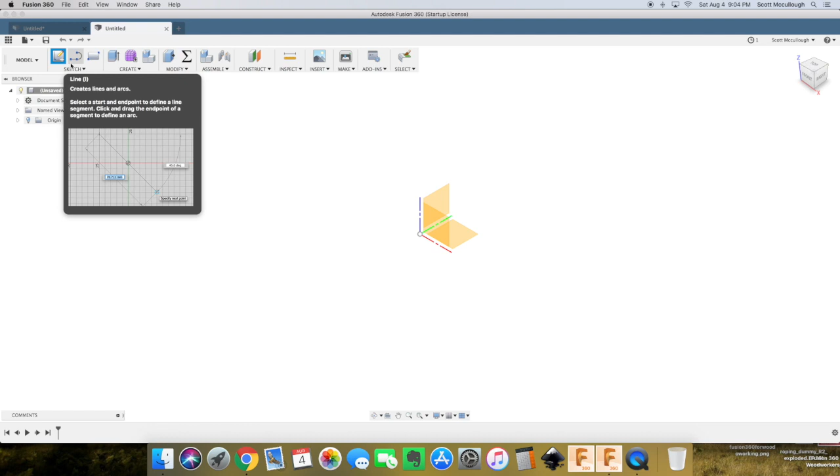Yesterday I gave you the general overview of the interface, and we went through the sketch drop down menu. To create a sketch, it has to be either created on a face, like a face of an object—let's say if you had a cube, it'd be on one of the sides—or what's called a plane, which you can see here. You get a top plane, left or right depending what side you go on, the front, and then bottom.

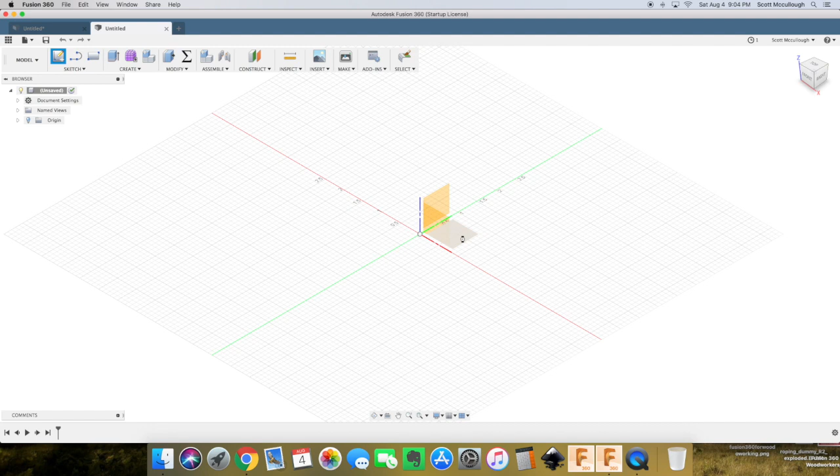So we're going to create a sketch on the top plane, and you can see when you get it selected how it changes. So we're at the top plane, and then I'm hitting R for rectangle, and you can see when I create that sketch on the top plane we get a little origin point. It auto snaps to that origin point, or you can draw it wherever you like. But normally, whenever I start a new design, I always start off on this origin point.

So we hit R for the rectangle, start out and drag one corner out on the plane. We'll just draw that out, and that's basically a rectangle—that's a sketch. I'm going to hit Control Z, or Command Z depending what type of machine you're on.

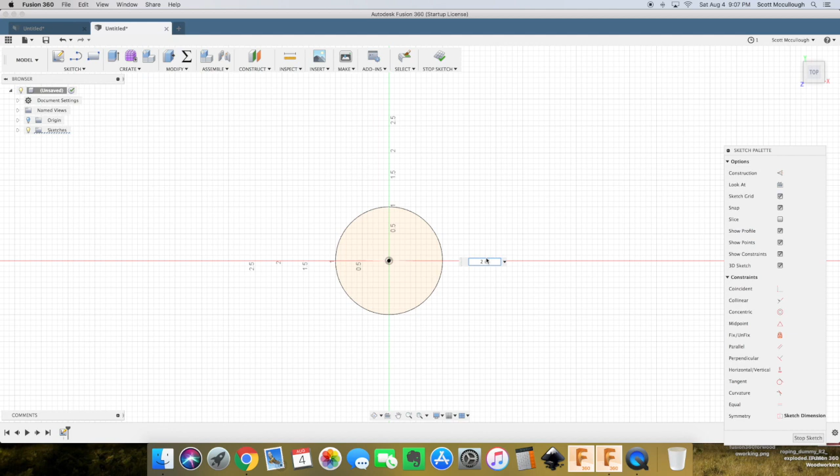Some of the other sketches: we've got circle, center diameter circle. Start off at our origin point and draw that out. As I was dragging that circle out with C for circle, it was giving us a dimension. You can make it whatever you want, then hit D to give it a dimension. There we go, and then we make that a 2-inch circle—it'll make it 2 inches. You can just double click on that and modify it to whatever you need.

So the next thing we'll show you is that you can create sketches on top of sketches. We're going to stick with sketches in this tutorial. So R for rectangle.

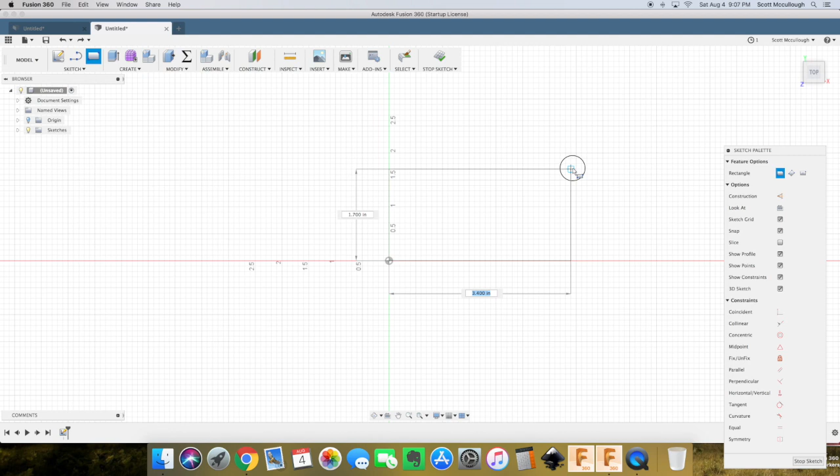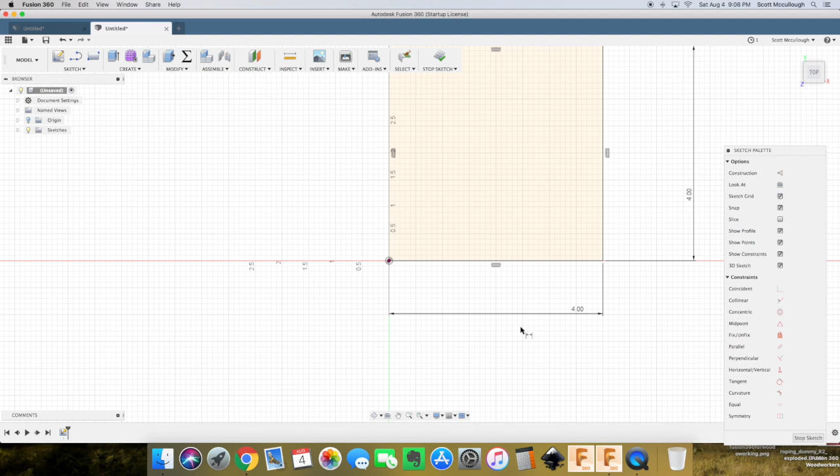Let's make a D for dimension, give this edge here a dimension—make it 4 inches by 4 inches. So 4 inches, and then F6 will zoom to the extents to fit it to the screen. Zoom out just a hair more.

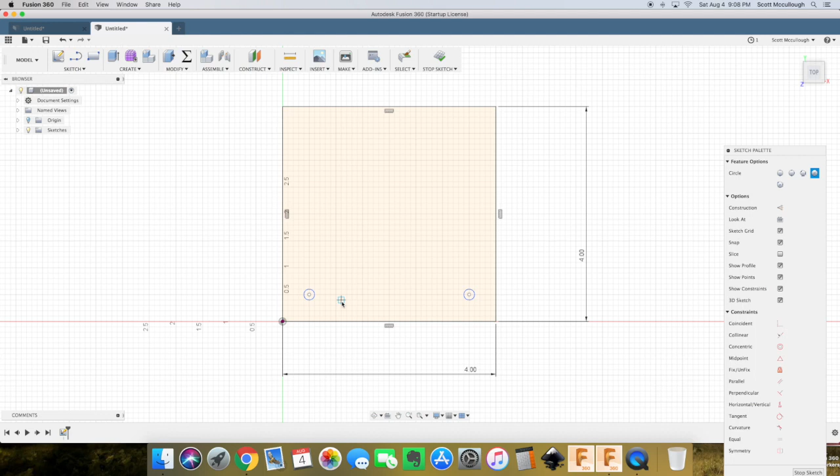Then we can make another sketch on top of this sketch. I like to use shortkeys normally—C for circle, we can put that wherever we want. We'll put a circle there. You can see that blue line telling us our circle's center is in line with where we're at now. We'll make another one, and it auto snaps—it thinks you want to make another circle the same size. So that was 200 thousandths, and it snapped to another 200 thousandths circle. Same thing—it auto snaps to that dimension.

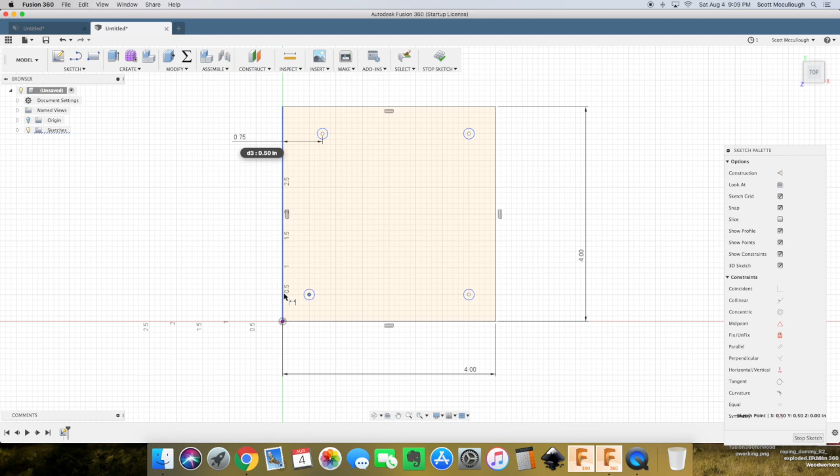So it's 200 thousandths, and then what you could do is give this a dimension from the center to here. We'll make that—say it's at half inch, we'll say 3/4 inch—and see, it moved it in. I'll show you a better way to do this in future tutorials, but we'll just stick with basic tools. You just go around and make these.

Like basic sketches, we will make a new design—we talked about that yesterday with the tabs, kind of like Google Chrome if you're familiar. So we'll create another sketch, and I'll show you how to make a simple sheet of plywood that you might be starting with—maybe we'll make a cut list. I've done this before.

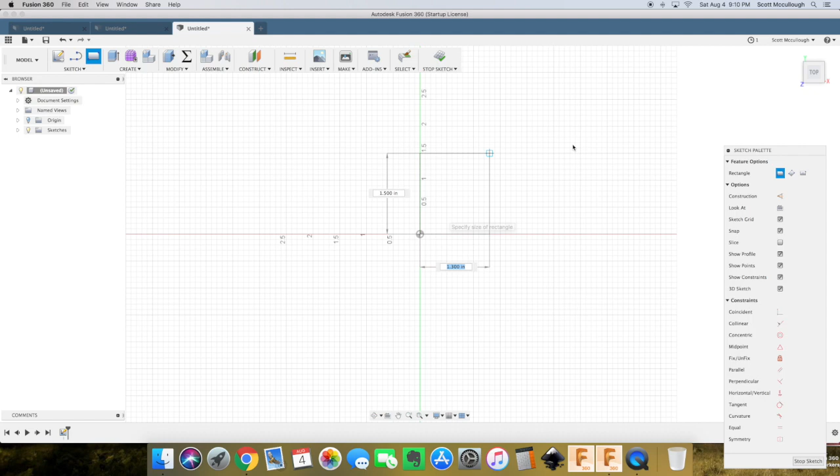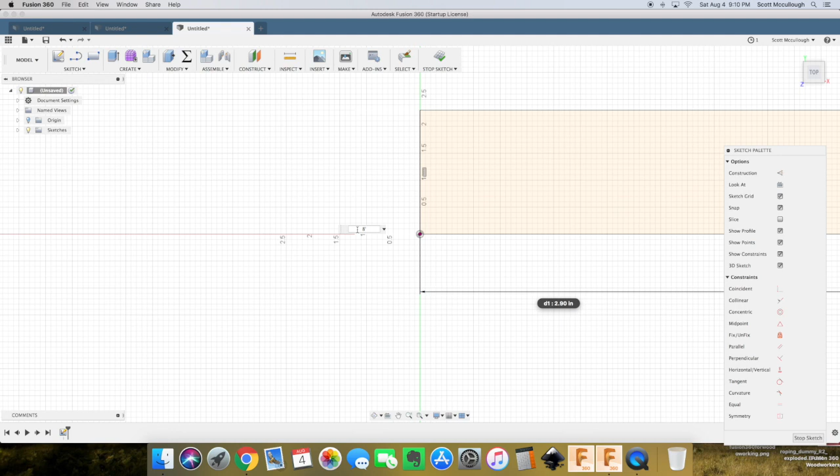R for rectangle, D for dimension. So we'll put 4 feet—D for dimension—8 foot. F6 will zoom us out to our extent. Zoom out just a hair more. So we've got 48 inches by 96, or 4 foot by 8 foot—a 4 by 8 sheet of plywood.

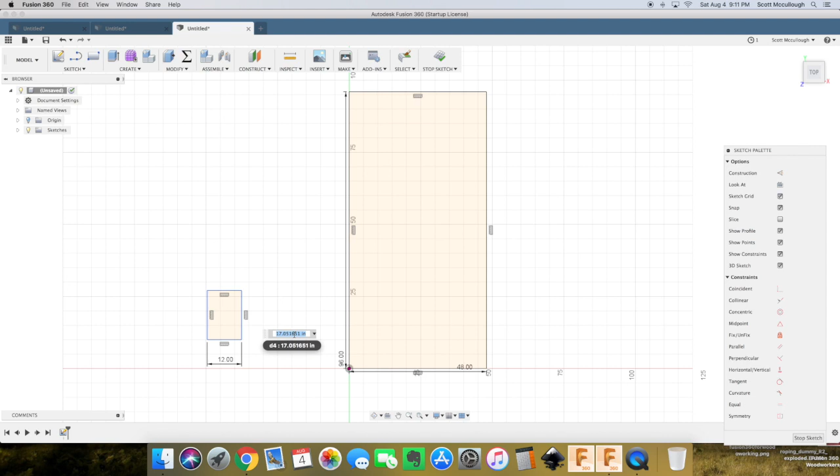And what you can do is, say you've got a cabinet size that you want to make—R for rectangle again. We'll make this 12 inches, so we're going to make this 12 by 12, and we'll just say that this is a side of a cabinet or something like that.

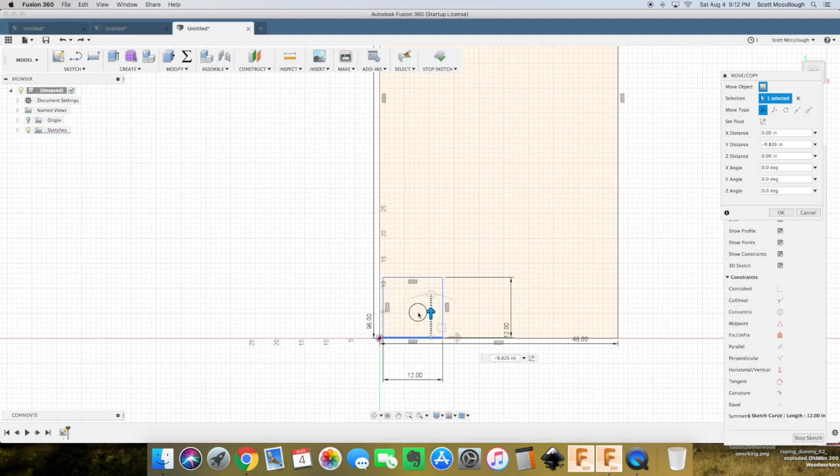So now that we've got our 12 by 12 square, we'll just hit M for move, and we can scoot this over. There's a better way to do this, but we're just going to stick with basic stuff because I don't want to overcomplicate it. We can line that up, so that would be a 12 by 12 square out of our 8 foot sheet.

So that's pretty much it for creating sketches. Tomorrow we're going to start extruding stuff and talk about getting sketches more defined and what that really means.